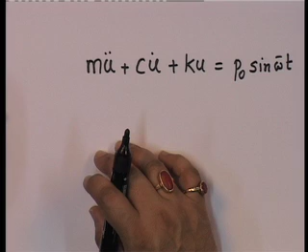If you remember, the equation that we solved, this was the equation that we had solved, and what we said was, well, this has two parts, a homogeneous part and a particular solution. We saw that the homogeneous part was really a free vibration solution, and the particular part was what we called the steady state solution.

The steady state solution was what we were interested in, because we said that by and large the transient dies out over a period of time, as long as the structure has any amount of damping in it. It is just that the transient part takes longer to die out if the damping is small, and it dies down quicker if your damping is large. So we saw that the solution came out to be of this form, and that is the steady state solution.

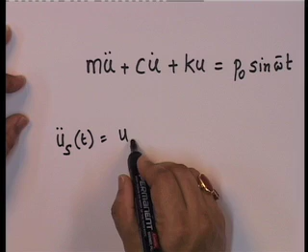The steady state solution came out to be, where u0 is equal to P naught upon k, and theta is equal to, I am sorry, there is a d here. So, theta is tan inverse of 2 xi beta upon 1 minus beta squared, and d was equal to 1 upon the square root of 1 minus beta squared the whole squared plus 2 xi beta the whole squared.

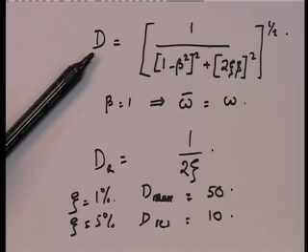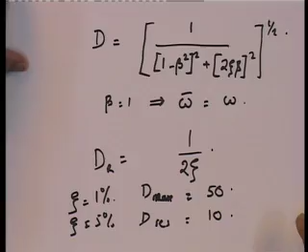Remember last time I had talked about it, and we had said that if you looked at theta at beta equal to 1, this becomes tan inverse of 2 xi upon 0, which is tan inverse of infinity, which is pi over 2 or 90 degrees. So irrespective of the damping, at resonance the phase angle is pi by 2 or 90 degrees.

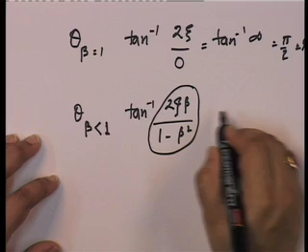We also saw that for beta less than 1, theta is tan inverse of 2 xi beta upon 1 minus beta squared. This term is positive for beta less than 1, and therefore theta is between 0 and pi by 2, or 0 and 90 degrees. This is what you see here: if beta is less than 1, the phase angle is between 0 and 90 degrees. At beta equal to 0, of course, it is 0 by 1.

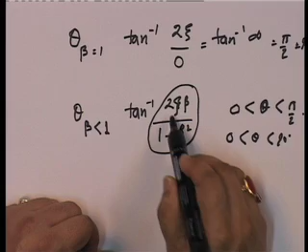So, theta is 0 irrespective of any this thing. And please also note that since this is tan inverse of 2 xi beta upon 1 minus beta squared, if xi is small, irrespective of beta, this value will remain small for a larger value of beta till it suddenly jumps up to 90. If the xi is larger, then it starts growing larger.

When beta is greater than 1, then tan inverse 2 xi beta upon 1 minus beta squared, note that this term becomes negative. If this term becomes negative, then theta goes into the second quadrant, pi by 2 to pi, or between 90 degrees and 180 degrees. So, if beta becomes greater than 1, it goes beyond 90 degrees, and if you take 1.2 for instance, you will see that all of them are between 90 and 180 degrees, or between pi by 2 and pi.

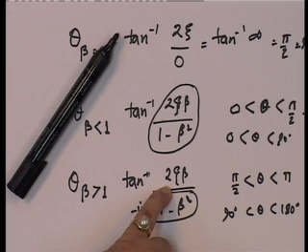And the point again to note is that if you have a very low damping, it's 0 till it comes close to 1. At 1 it's 90 degrees or pi by 2, and right after it goes beyond, it becomes practically 180 degrees. So, it flips, and that is understandable, because this is going to almost 0, and if it goes to 0 from the negative side, the limit of tan inverse is pi by definition. So, that is what you have.

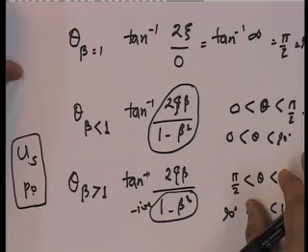So, this phase response is a very important aspect, because irrespective of damping, the phase between the steady state response and the loading becomes 90 at resonance. So, if we use two channels, one input with the loading and one input with the steady state response, these being 90 degrees out of phase implies that they become a circle. It's very easy to see when resonance occurs, and you can find out the natural frequency for low damping values by looking at this xy plot, which remains like this when they are in phase.

So, assume a very low damping, 2% damping structure: it remains like this till it hits resonance, then it becomes like this. And as soon as it crosses resonance, it goes back to something like this. So, the resonance can be picked up very easily, and resonance is where the excitation frequency is equal to the natural frequency of the structure. So, this is a beautiful way of finding out the natural frequency of a structure.

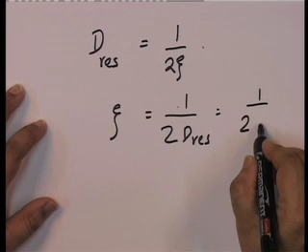So, now the other question is, since we saw that D at resonance is equal to 1 upon 2 xi, you can write xi is equal to 1 upon 2 D at resonance. And D is nothing but US max upon U0. So, this basically becomes U0 upon 2 US max.

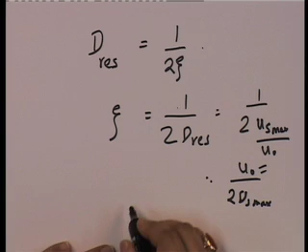So, going back to the previous one, if I look at the displacement response and the dynamic amplification factor, I see what the maximum value is and read it off. So, here for example, on this structure the maximum value is 10 times u0. So, this is 1 upon 2 into 10, which is 1 upon 20. So, xi is equal to 5%.

So, this is another way of finding out the omega, because when you get resonance, you get this to come like this. So, you know that the phase angle is 90 degrees, and that tells you the value of omega. So, this one gives you the omega, the natural frequency of the structure, and this gives you the damping. In other words, this is another way of finding out the dynamic characteristics of a structure.

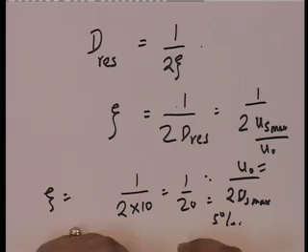Now, before I continue, remember last time I said: what if you have a structure which is subjected to this kind of loading.

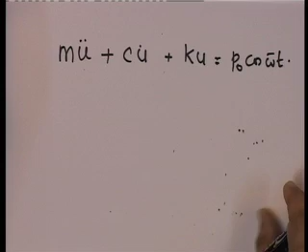It is a harmonic loading, but it is subjected to P naught cosine omega bar t. Remember I had said that you should do it yourself. Now, what I will do is, let me just solve this problem for you. You must have already tried solving it, but I'll go through the steps. Very, very easy steps.

I am only going to do the steady state solution. So, steady state solution, what form does it take up? Remember that it always takes up the form G1 sine omega bar t plus G2 cosine omega bar t. So, this is the form that it takes up, and if I calculate U dot s of t, it is equal to omega bar G1 cosine omega bar t minus omega bar G2 sine omega bar t, and U double dot s of t is equal to minus omega bar squared G1 sine omega bar t minus omega bar squared G2 cosine omega bar t.

So, if I substitute all of these into this above equation and collate the sines and cosines, I get minus m omega bar squared plus k times G1 minus c omega bar G2, sine omega bar t, plus omega bar c G1 plus minus m omega bar squared plus k times G2, cosine omega bar t. So, this is the left hand side of the equation, and this is equal to P naught cosine omega bar t.

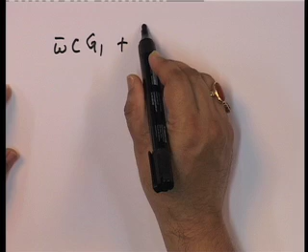So, if that is the solution, then what happens? We get that omega bar c G1 plus k minus omega bar squared m G2 is equal to P naught, and we get k minus omega bar squared m G1 minus omega bar c G2 is equal to 0.

Now, remember I had said last time that we divide both of the equations by k. I am not going to go into the details, we have already done it last time, please review it. This will imply that 2 xi beta G1 plus 1 minus beta squared G2 is equal to P naught upon k, and 1 minus beta squared G1 minus 2 xi beta G2 is equal to 0. By the way, this is P naught upon k because I have divided both by k, and 0 by k is 0.

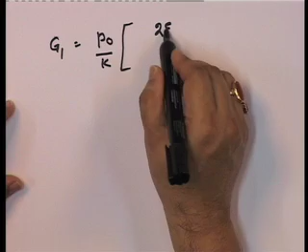So, these are the two equations that I solve, and if I solve them, I get that G1 is equal to P naught upon K times 2 xi beta upon 1 minus beta squared squared plus 2 xi beta squared, and G2 is equal to P naught upon K into 1 minus beta squared upon 1 minus beta squared squared plus 2 xi beta the whole squared. So, that is G1 and G2, and therefore, the solution then becomes the following.

U s of t is equal to, I am going to put P naught by K and 1 minus beta squared squared plus 2 xi beta the whole squared outside, and what I get inside is 1 minus beta squared cosine omega bar t plus 2 xi beta sine omega bar t. This is the steady state solution when you subject it to P of t equal to P naught cosine omega bar t.

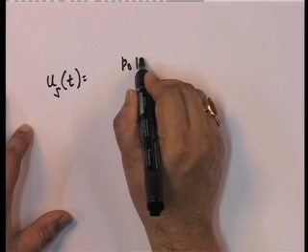Now, note something very interesting. If you look at this particular solution, remember, what is cosine x minus y? Cosine x minus y is cosine x cosine y plus sine x sine y. Remember that, and then you will see that this solution becomes obvious. U s of t is equal to P naught by K upon 1 minus beta squared squared plus 2 xi beta the whole squared.

Let's look back at this. This is cosine x cosine y plus sine x sine y. So, this is sine x, this is cosine x. And if I look at the two of them together, it becomes 1 minus beta squared squared plus 2 xi beta the whole squared to the half. So, this one gets cancelled, this becomes again half, and what we get is cosine of omega bar t minus theta, where by definition tan theta is sine x upon cosine x, so theta is tan inverse of 2 xi beta upon 1 minus beta squared.

Look at this solution. Except for the fact that this is P of t equal to P naught cosine omega bar t, and therefore you have cosine here, if this was sine you would have sine here, with exactly the same theta and exactly the same dynamic amplification factor, because U s max upon P naught upon K is equal to 1 upon this, which is again D, the same as what we have shown here.

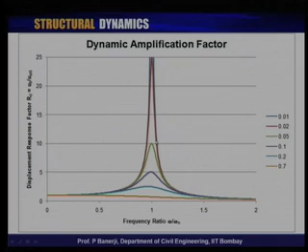So, note that this dynamic amplification factor and this phase response are both equally true, irrespective of whether it's a sine omega bar t or a cosine omega bar t or a linear combination of the two. So, therefore, for any harmonic response, this is the dynamic amplification factor and this is the phase response. So, although I had originally developed it last week for sine omega bar t, this week I have shown you that this is equally valid for cosine omega bar t.

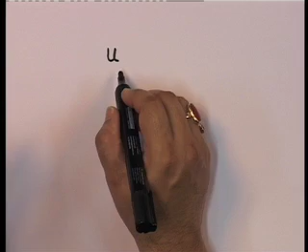Okay? So, once we have this, now let me go back to the Argand diagram that I was looking at. In the Argand diagram, let me again restate the solution process. I will just do this for sine omega bar t; it does not matter. So, us of t is equal to u0 into D into sine omega bar t minus theta.

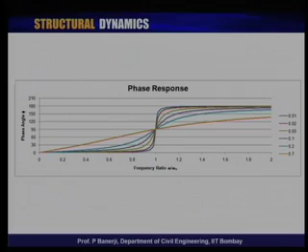So, note that this solution that I have, although I have sine here, is equally valid for any arbitrary harmonic. Only thing that is going to happen is that the displacement response is going to lag the forcing response, which is the load response, by theta. That is a given, and we know what that theta is. That is this phase response that I have shown over here. Okay? So, theta is a known value.

So, let me just go back. Velocity becomes what? Let's plot it. This becomes u naught D omega bar cosine omega bar t minus theta, and u double dot s of t becomes minus u naught D omega bar squared sine omega bar t minus theta. Now, these are the displacement, velocity and acceleration. And let me look at p of t. P of t is p naught sine omega bar t, right? Okay. So, let us be very, very clear about this.

So, if I were to plot it on the Argand diagram, how will it look? Now, I am coming back to the Argand diagram. Well, let us plot it. This is the real axis, this is the imaginary axis, and what did we say was the Argand diagram? Well, if I plot p naught sine omega bar t, I am going to plot a vector of magnitude, again what is the magnitude? P naught. So, I am going to plot a vector p naught.

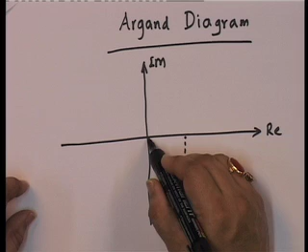And what is that vector? u0 D. So, this vector is u0 D, and it lags by theta. Note that if I plot this, this becomes omega bar t minus theta. So, then if I look at the real projection, you get u0 D sine omega bar t minus theta, which is what this is. Okay. So, this vector represents the displacement vector. Now, let us look at this vector. It is cosine omega bar t minus theta.

Remember, cosine always leads the sine by 90 degrees. So, if I were to look at the cosine plot, it would be 90 degrees to this line, where this angle is omega bar t minus theta, and this value is u0 D omega bar. So, this vector represents the load, this represents the displacement, and look at it, the projection on the real axis of this is u naught D omega bar into cosine of omega bar t minus theta, which is what we have here.

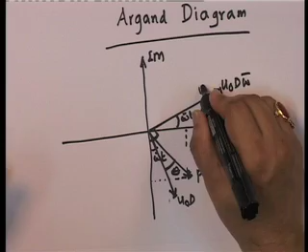Okay. So, this vector represents u dot, this represents u, this represents p, and finally, if you look at this one, the acceleration is minus of sine omega bar t. So, minus means just the opposite direction.

And what is the value? The value is equal to u0 D omega bar squared. So, this represents u double dot. And if I take the plot, what is this one? This one is omega bar t minus theta. And if I look at the projection of this, it becomes u naught D omega bar squared into sine of omega bar t minus theta, but since it is on the negative real axis, it is negative and it represents this.

So, the first Argand diagram that I have drawn represents the displacement, the velocity, and the acceleration. Now, the next Argand diagram I am going to draw is going to be purely on the forces, force equilibrium. So, what does it become then? Let's look at this particular aspect.

And finally, the fictitious inertia force: if any body has mass, it resists it. If a body is accelerating in a particular direction, what does Newton's second law say? There is an equal and opposite inertia force that is proportional to the acceleration but opposes it, and that I call the inertia force, and that is equal to m u double dot of t. So, I plug in the values and the directions.

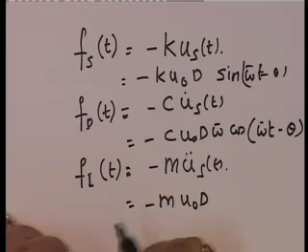What do I get? This is equal to minus k u naught D sine omega bar t minus theta. This is equal to minus c u naught D omega cosine omega bar t minus theta, and this is equal to minus m u naught D. Note, it is not minus because this itself is minus. So, minus minus becomes plus m u naught D into omega bar squared sine omega bar t minus theta. So, these are the forces. Note that this plus this plus this is equal to P.

So, now let me go through a few steps here. I am going to plug in the value of u naught. u naught is equal to P naught upon k. So, Fs of t becomes equal to minus P naught D into sine omega bar t minus theta. Now, again I plug in P naught upon k here, and remember c omega bar upon k is equal to 2 xi beta. We have already derived this. So, f_D becomes equal to minus P naught into 2 xi beta D cosine of omega bar t minus theta, and f_I of t.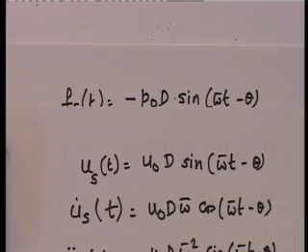So, if I plot the Argand diagram now, what does it become? Now, I am going to draw the force Argand diagram, and let us plot it again.

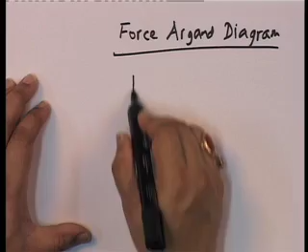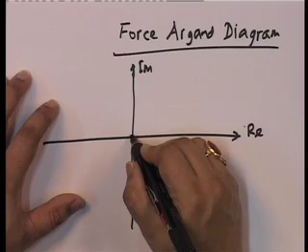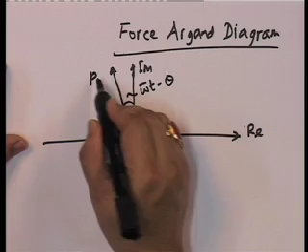Real, imaginary, and remember P naught is in this direction with omega bar t. Then this was the direction of u. So, therefore, just the opposite direction would be Fs. And what are the units? What are the dimension? Magnitude. Magnitude is P naught d. So, this is going to be omega bar t minus theta, and the magnitude is going to be P naught d.

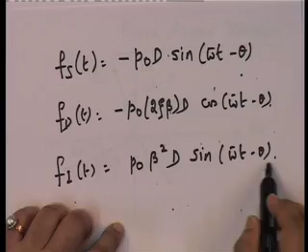Okay. Now, remember, this was the direction of the velocity. So, this will oppose it. Your damping force is going to be equal to P naught into 2 xi beta d, where this is omega bar t minus theta. And finally, remember Fi is sin omega bar t, P naught beta squared D. So, therefore, this one will be in this direction, and it will be P naught beta squared d, where this is omega t minus theta.

Now, note I have made an assumption here. What is the assumption? That theta is between 0 and pi by 2. In other words, a priori I have made the assumption in this Argand diagram that theta is less than pi by 2, which basically means that beta is between 0 and 1. Now, let us look at this particular one. How does it look?

Now, if you look at this, what we are saying is that this triumvirate, where this is 90 degrees, this is 90 degrees, these triumvirate of forces, this is Fs, this is Fd, and this is Fi, Fs plus Fd plus Fi is equal to P of t. So, in other words, if I take a snapshot at a particular instant of time t, these three together equilibrate this. So, vector addition of this plus this plus this is going to give me a vector which is along this line.

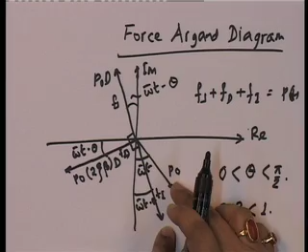Okay. Now, then the question becomes, how do we tackle this problem? Note that as t varies, this will go like this, but these three are connected to P and will also move with it. So, in other words, this interplay is going to be phase lag. Now, the inertia force phase lags the applied force by theta. The elastic force opposes that inertia force, and this one is at 90 degrees, because it is proportional to the velocity and opposes the velocity. And remember that velocity is 90 degrees out of phase with acceleration and displacement. Okay, we have seen that.

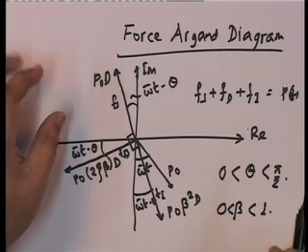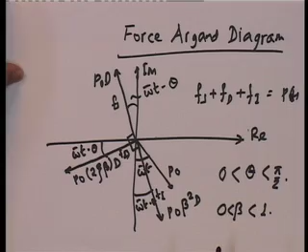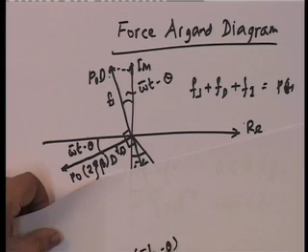Now, this is a very interesting thing. It is very hard for me to show that these three meet together, but let us try to see what this represents in the real plane. So, if I plot the representation on the real plane, what is that going to be? That is going to be equal to P naught d sine omega bar t minus theta, and this is minus because it is along the negative. So, this represents the real part of the spring force, negative.

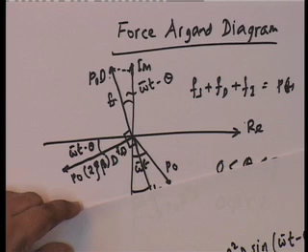Right. Now, let us look at this one. That is going to be equal to P naught beta squared d into sine, note that this is plus. So, I have put this plus this plus this. So, this one is going to be P naught into 2 xi beta into d cosine omega bar t minus theta, and note that this is on the negative plane. So, this should be negative. This is equal to P naught, because we have said that all of these are together.

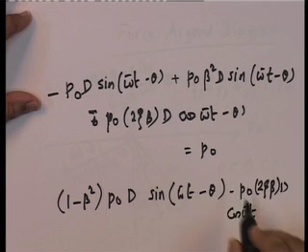Now, let us see if this makes sense. Sin omega bar t goes together. So, then what does this become? This will become 1 minus beta squared P naught d sin omega bar t minus theta minus P naught 2 xi beta cosine omega bar t minus theta is equal to P naught sin omega bar t. Now, how do we show that this is equal to this?

Well, let us go one step further. So, this Argand diagram I am proving to you in a roundabout manner. Let us see how I get these two together. If I look at these two together, I am going to plug in the value of theta in here.

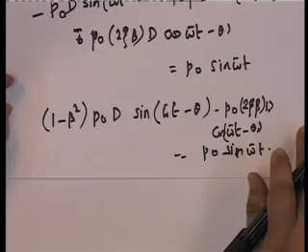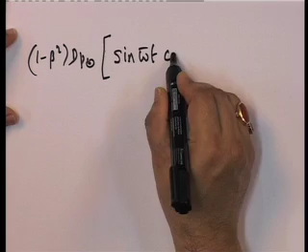So, if you look at this, I am going to expand these. If I expand these, what do I get? I get 1 minus beta squared into d into P naught is equal to, well, on this side I get sine omega bar t cosine theta minus cosine omega bar t sine theta. Okay. And on this side I will get P naught 2 xi beta d into cosine omega bar t cosine theta plus sine omega bar t sine theta, and this is equal to P naught sine omega bar t.

Now, let's just go through with this. Let's just look at what we get here. What is d? D, if you look at it, is equal to 1 upon the square root of (1 minus beta squared) squared plus (2 xi beta) squared, and theta is equal to tan inverse 2 xi beta upon 1 minus beta squared. Okay. So, tan theta is equal to 2 xi beta upon 1 minus beta squared. That is tan theta.

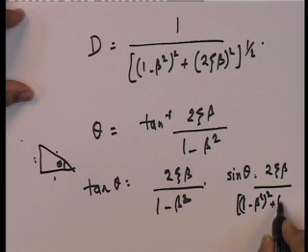So, if we look at this, then what becomes sin theta? If tan theta is this, let us look at the thing. This is theta. Tan theta is this upon this. So, this is 2 xi beta, this is 1 minus beta squared, and so sin theta is this upon this. So, sin theta is 2 xi beta upon the square root of (1 minus beta squared) squared plus (2 xi beta) squared. Pythagoras theorem: this squared plus this squared, square root of that is this.

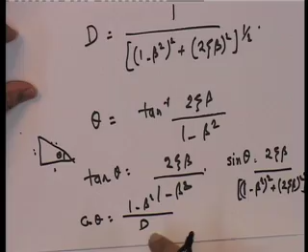And so, what is cosine of theta? Cosine of theta is this upon this. So, that is 1 minus beta squared upon, what is this? This is nothing but d, right. So, I am going to put this as d. So, having put these in, let me plug these into these equations that I have here. Cosine is 1 minus beta squared upon d, and sine is 2 xi beta upon d. So, d cancels out, and I am left with the following.

I am left with this 1 minus beta squared. The d goes out. So, sin omega bar t into cosine, which was 1 minus beta squared upon d, so d is gone, and the other one is cosine omega bar t into 2 xi beta upon d, again that is gone. Then minus p naught into 2 xi beta. The d goes inside, so this becomes cosine omega bar t into cosine theta, 1 minus beta squared, the d cancels out, and the other one is sin omega bar t into sine, that is 2 xi beta, the d cancels out. And this is equal to p naught sin omega bar t.